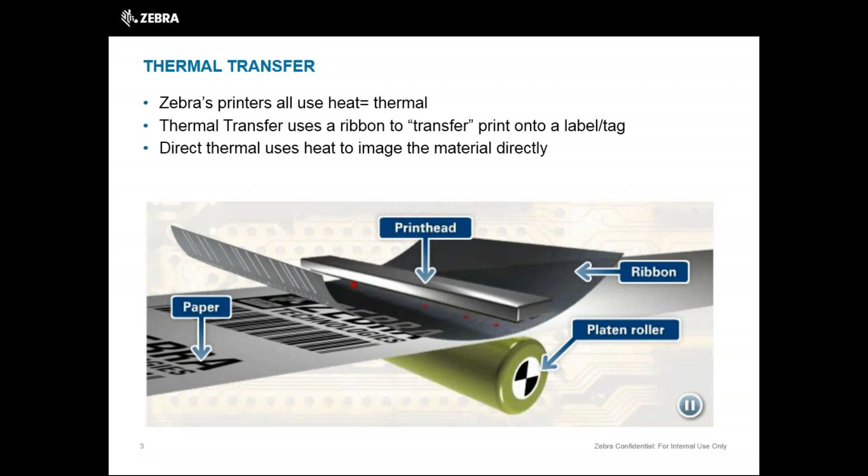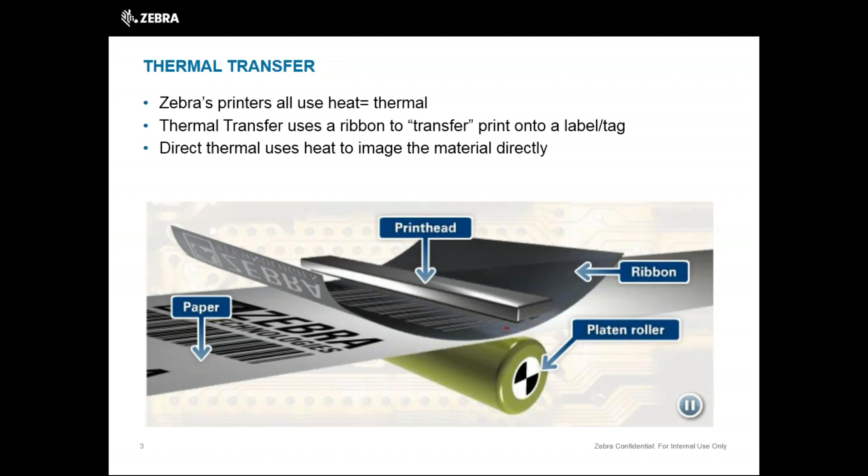The red you can see is the heat coming down. The darker grey depicts the ribbon. By ribbon, we mean an actual roll of very thin polyester film, with ink on the back of it. The term thermal transfer comes from the fact that the heat is transferring or melting the ink off the back of that ribbon and transferring it onto the substrate underneath. By substrate, I just mean whatever you're actually printing onto.

With direct thermal, no ribbon is used—I'll come back to thermal transfer in a second. The materials used in a direct thermal printer have a special coating that, when heat comes into contact with it, reacts and turns black, and that print becomes part of the label or tag. To use an analogy, think about putting a piece of steak or vegetables in a griddle pan—where the pan is hot, you get dark marks on the meat or vegetable. It's a little bit the same when you print onto a direct thermal product.

That print becomes part of the label or tag, and that's irreversible. So usually the white surface would turn black when the print appears on it. You can get coloured direct thermal, but I'd say 99.9% of what we do is with a black print.

With thermal transfer, as we explained, this is where the ribbon is used, and the ribbon passes between the print head and the media, and the heat causes that ribbon to release its ink and transfer it onto the stock.

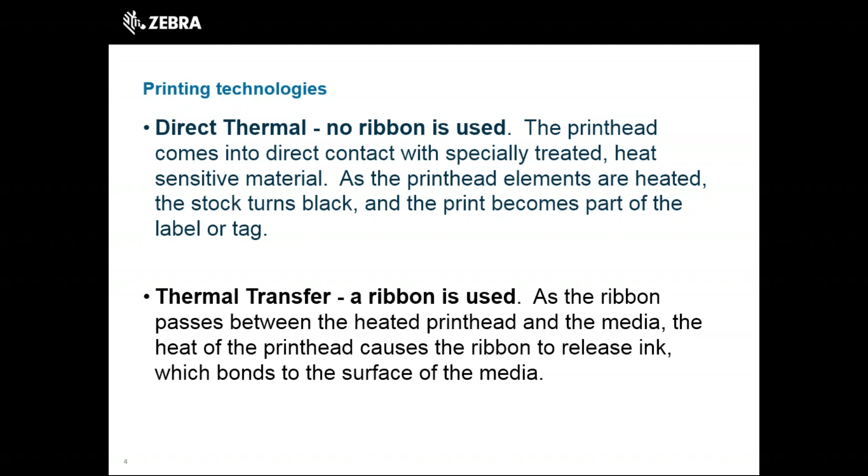But why do we have both? What's the difference between the two, and when would you use them? I'm going to start again with direct thermal. Direct thermal has got lots of advantages because you only have to buy one item. You buy a roll of direct thermal labels, put them straight into the printer, and you're printing straight away. You'll get high quality images, it's easy to use, quick and simple.

If you think about a nurse or doctor printing a wristband in a hospital, our wristbands are direct thermal because they've got more to think about than setting up a printer. They just want to pop that roll or cartridge into the printer and go. And you do get really good quality images.

Direct thermal is fine for lots of applications. If you order a parcel from Amazon, the label on there will be direct thermal. And I do check labels that come on my packages - I know that's a little bit sad, but I do get my label and have a look and see what kind of product it is.

But an Amazon label, for example, what's the lifespan there? If you have Amazon Prime, that label maybe has to last 12, 24 hours maximum. It's absolutely fine, and Amazon are printing hundreds of millions of labels a year, so they want quick and easy, simple operation. The downside to direct thermal is that because it's a heat reactive product, it reacts to other heat sources, not just the heat from the printer.

So if you were to put a direct thermal label outside in the boiling hot sun in Dubai, or even in this country at the moment because of the heat wave we're experiencing, you'll see it's sensitive to that heat also. Usually direct thermal is for short lifespan labels that don't need to resist a lot of environmental conditions. You've got a limited range of products with direct thermal, but we can cover a lot of applications, and actually our biggest selling label material is our premium direct thermal product. So it's a very popular choice, but tends to be for shorter life and simple labeling applications.

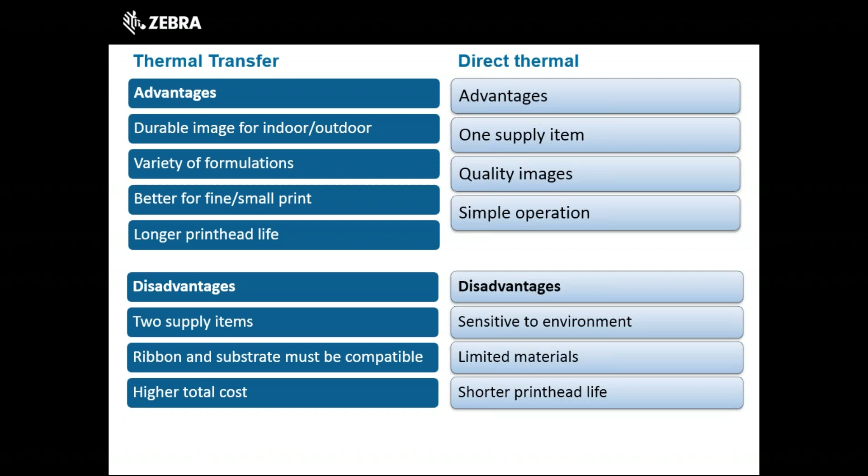We've got 6 manufacturing locations across the world. 2 of those are in Europe and 4 are in the States. I'm still holding out for a visit to the California plant, but with the weather at the moment, maybe I don't need to. In the UK, which is where I'm based, this is our biggest manufacturing facility for Europe. We also have label manufacturing in Heerenveen in the north of Holland, where we also have our distribution centre.

Supplies actually represents a $9 billion market, so there is a lot of business out there, both for us and for you.

We offer a variety of products, something for every printer that we make. So we have tags, labels, receipts, ribbons and wristbands, and we are in fact the largest thermal converter in the world when you put all those sites together.

But why are supplies important? I know we're going to talk about printers in a little while, but let's face it, every printer requirement starts with the need to have a printed output. So you don't buy a printer just to buy the nice box, even though they are fabulous. You buy it because of the printed output coming out of the front of the machine.

Our research has shown that every year you can spend 3 to 10 times the cost of the printer on the supplies, and the quality of those supplies can directly impact performance. It can impact how well your printer runs, the amount of uptime you've got and your productivity, and therefore the quality to your end customers if you don't have something that is working correctly.

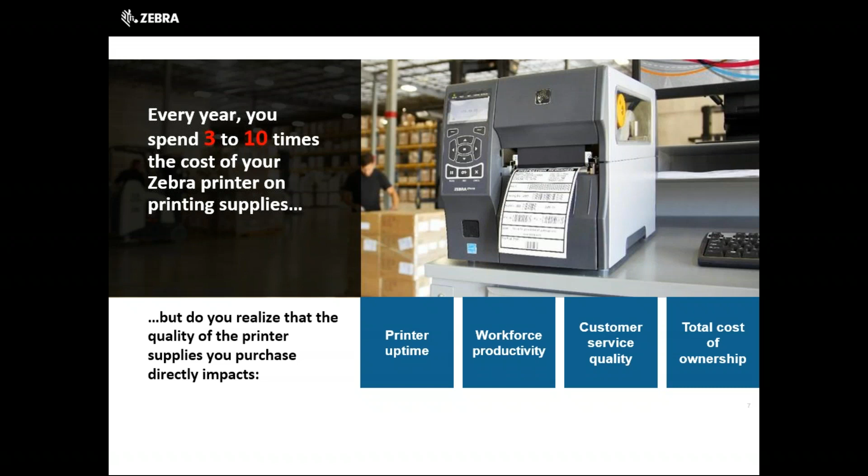So what do our supplies offer over and above other products in the market? Let's have a look at what we do to make our supplies the best.

Zebra supplies are called Zebra certified supplies, and that means simply that they are certified for use in our printers, and they are the only products on the market that are certified for use in the printer.

We realise there's a lot of choice on the market and not all materials are created equal. Something that on paper may have the same specification as another product might perform very differently when you put it into a printer.

So our job and what we do for you is to go through the choice of products on the market. We make it our business to know what's available and what the quality of products is, and from those we'll make a selection. It's a little bit like X Factor - we start with lots of products and filter them down until we have the best ones at the end.

We do a lot of our testing ourselves here in Preston. We have a print room that's got one of each of the Zebra printers in it, and we can do a lot of filter testing here.

For example, if it's a paper that we know will be used in a mobile, a desktop and a mid-range printer, we wouldn't just test it in one, we'd test it in all of them at a range of temperatures and a range of speeds to try and simulate as much as possible actual end user use cases.

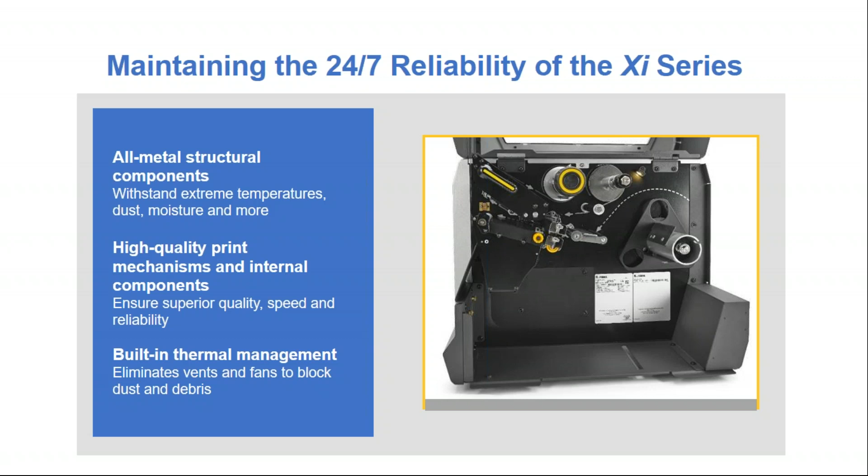Many thermal transfer applications have operating environments that can be brutal to printers. The design of our Xi series means that number one priority for us is still reliability, and throughout the product we make design choices that reflect this. We use the toughest materials in the design to meet the challenge of a long life in tough thermal transfer environments these printers can encounter.

It's not uncommon to see ultra-fine, high-resolution output in a thermal transfer solution, particularly in high-tech manufacturing, electronics, and also the pharma industry. The design of the printer allows for small media performance and associated ribbon handling, printing down to 3mm labels.

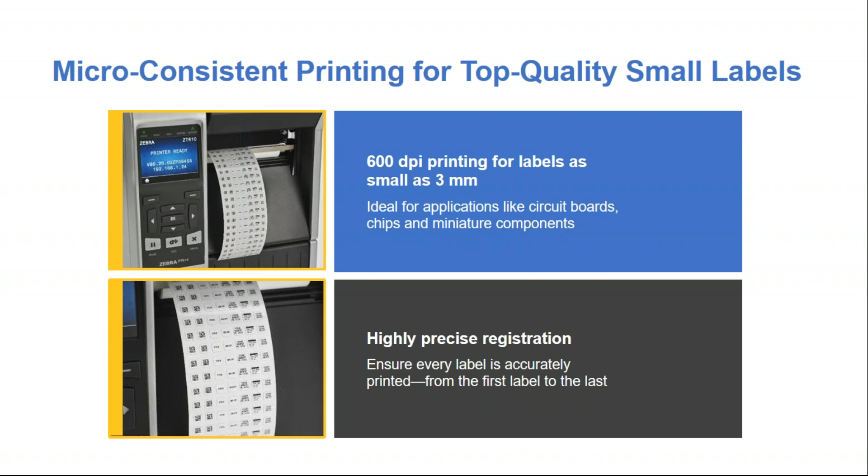Reliability and features shouldn't come at the cost of complexity, and with the ZT series we've made many improvements. Shown on the ZT600, and perhaps most obvious, is the side-loading media, so no more threading the material from the rear through the printer mechanism. Other improvements are well-guided media and ribbon paths to give visual clues to the operator.

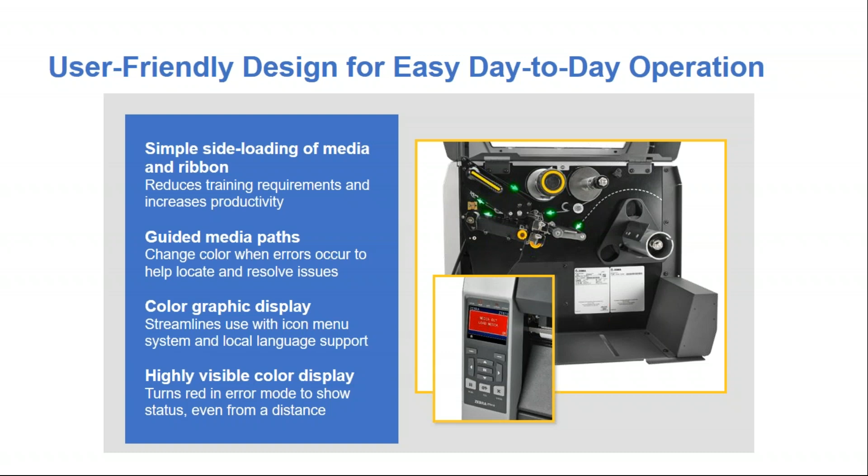Despite all the management applications we alluded to earlier, we now know that many customers manage their printers directly. So we have a color display that gives you a variety of different signals, amber and red conditions for the printer status, something that can be seen from several meters away. Ribbon usage can be more accurately measured and managed via this means as well.

Looking at the desktop printers, there is a changing market in this portfolio - better connected, smarter, users and applications requiring more. Easier ways are needed to integrate, use and manage a desktop printer.

Ease of use is perhaps most evident with the ribbon cartridge in the ZD420C. It should be noted that all the competitive thermal transfer printers are more difficult to load, with secondary spools, cores, mechanisms and levers, which add to the complexity and time associated with ribbon loading techniques.

Our EMEA market represents 250,000 thermal transfer desktops, some of which are competitive devices, so a LinkOS virtual device is certainly a worthwhile investigation.

The markets and applications available to the ZD420C are no different to the other thermal transfer printers. However, there is a need for an easier, error-free solution.

There are two schools of use for the cartridge-based ZD420: infrequent users and also the prolific ribbon users. You have a group of people, some seasonal workers, some casual workers, who don't necessarily understand the product. When it comes to changing the ribbon, it leads to complexity, it leads to errors, it leads to increased downtime.

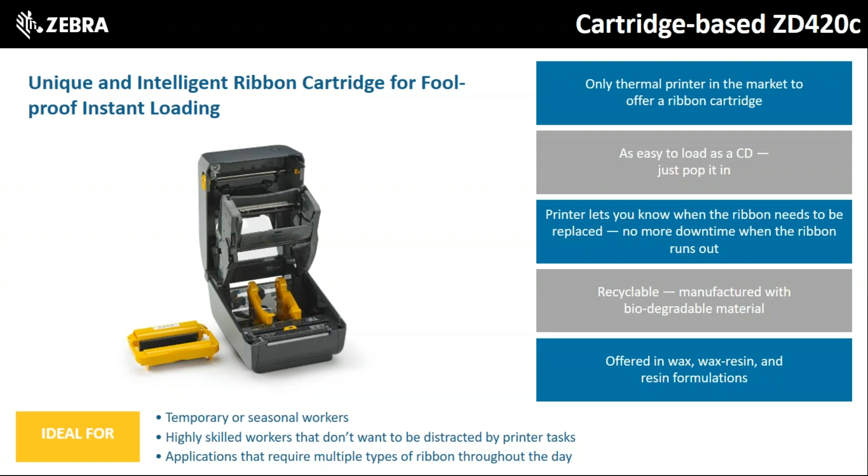The chip-based cartridge means there's cognitive ability between printer and ribbon. We can accurately alert users to any issues, warn them of any impending ribbon change, so a new cartridge can actually be readied in advance.

Many of the printer's points of use will see mission critical output, so these can be reconciled against the print job and also against the installed ribbon type. Certain alerts can be set around that.

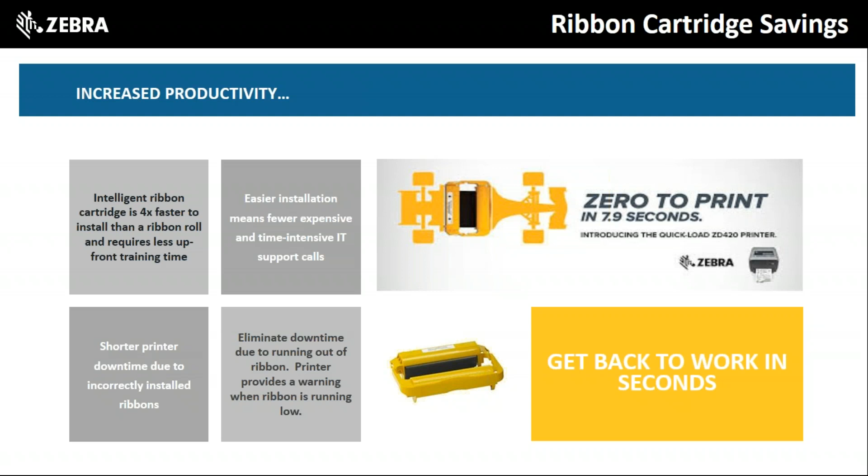The cartridge solution is also cleaner, so applications where dirt or particles are being measured will benefit from this cartridge-based ZD420C. Think about laboratory workers.

Now, we need to factor in several elements when we look at the cost of managing a thermal transfer solution. A lot of people do argue that the cartridge-based ZD420 is perhaps more expensive, so hopefully the next couple of slides will start to dispel some of those myths.

So the various factors that we need to look at: productivity, support costs, and downtime. Now, an average customer will incur between 20 and 40 hours per year of IT support to assist users with ribbon loading issues. This is based on a 100 printer installation. Many of that IT support hours is down to regular supplies concerns, ribbon loaded incorrectly, lost take-up calls, etc.

Now, when a thermal transfer ribbon cannot be installed or is incorrectly loaded, then those associated labels cannot be output. And many of these business processes where thermal transfer are used are fairly critical. So the solution here allows for those finished goods and that production to keep going, that production line to keep functioning.

So again, we've got no loss of productivity, and in certain applications, that loss of productivity can run into the thousands of euros per hour.

Our unique ribbon mechanism design sees dual ribbon handling lengths, longer lengths accommodated compared to competitors. It's a unique roll-to-roll design that allows for easy ribbon installation without the complexities associated with many competitor solutions. The roll-to-roll system for ribbon supply and ribbon take-up means the loading process is kept to a minimum. It also allows for partially used rolls to be easily removed without breaking them, essentially a drop-in, drop-out method, meaning ribbon types of wax resin can be interchanged as appropriate to the media being used.

The dual ribbon capability provides two ratios of ribbon to media. The 74 meter offers a 1-to-1 ratio, whereas the 300 meter is a 4-to-1 ratio. Therefore, the appropriate meterage can be selected according to the application. A longer ribbon roll means increased uptime, less frequent roll changes, and also a cheaper price per meter.

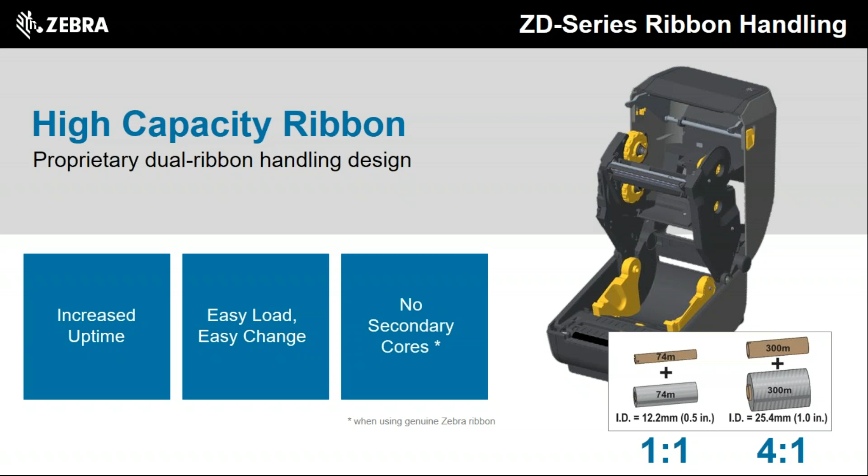For any of you that sell multiple brands, I would challenge you to load a ribbon in a competitive printer quicker than you can in a Zebra thermal transfer desktop.

Our design of the new ZD series has seen improvements and enhancements to the media handling on both the ZD420 and ZD620 models. I won't talk at length about all of these except for one feature, the media dancer arm. Another step change on our ZD series desktop printers in respect to print quality is our dancer arm feature. It's now available in a compact desktop form factor on the ZD620 model, so it's unique to this class of printer.

Customers buy a Zebra desktop printer because of the known print quality. The media dancer arm maintains even tension on the media roll and delivers maximum print quality on every label regardless of print speed. Competitive printers operating in thermal transfer mode need to lessen their print speed to achieve some level of quality. We can maintain the expected Zebra print quality and run at the highest speeds thanks to this new media dancer arm feature on our ZD620.

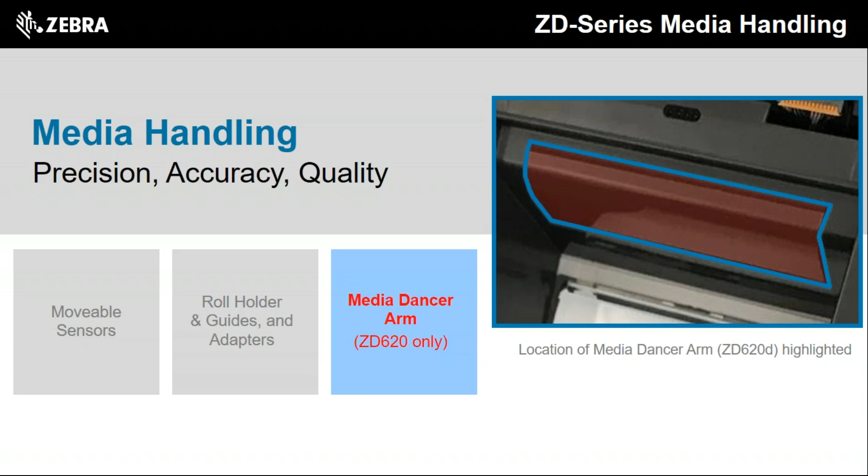With the ZD620, you get the same advanced technology as our higher end industrial printers, but in a compact desktop form.

Hopefully some of you will be familiar with the term Thermalock. Some of you might have been familiar with an older mobile model we had, the P4T. However, that was removed from sale. However, there's still a need to take thermal transfer in the field or on the go, so Thermalock is our answer to this.

Thermalock is a new product, exclusive to Zebra. It gives excellent performance and durability, but in a direct thermal solution. So you may ask, how can that be? Well, regular direct thermal works via a chemical reaction between heat and the dye chemical. Because it changes colour with heat and chemicals, it's also susceptible to other sources of heat, so it fades under sunlight and can also be affected by chemicals.

But Thermalock is different. Its structure is like that of a honeycomb, made of a proper polypropylene film. The way it works, it breaks the skin of the material, if you like, to reveal a black layer, and this black layer is far more robust than traditional thermal transfer solutions. So if there's a need for thermal transfer and true mobility, then Thermalock is certainly a consideration.

Like I mentioned, we used to have a thermal transfer mobile printer, the P4T, but unfortunately limited sales saw us remove this from sale. We can, however, still offer some level of robust output on that mobile printer by way of the Thermalock.

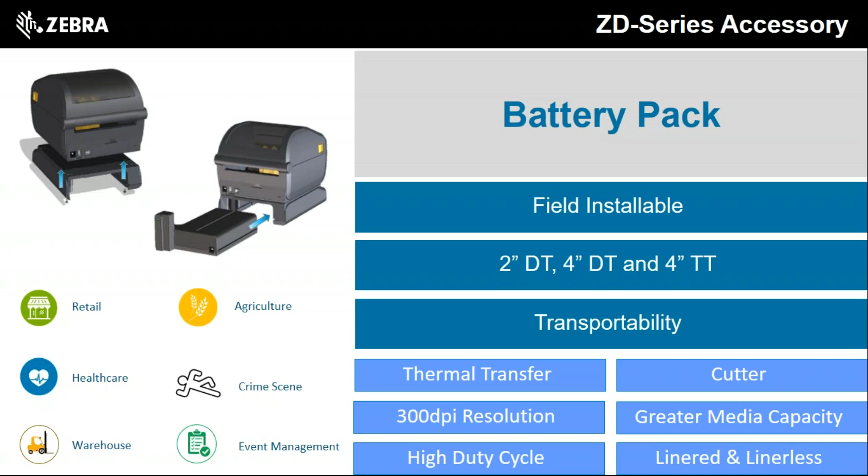But for a true thermal transfer solution on the go or in the field, we are developing a transportable solution, launching later this year. It will be a field installable option for the ZD410D, any of the ZD420 models, or the ZD620 models. This battery pack offers you the possibility of fulfilling your thermal transfer output at the required point of production or use. We're currently running an evaluation program, which we do prior to any product launch. So if you're interested, please contact Vera or myself, and we can give you further details.

Now, Catherine was talking about some of the applications earlier. We could talk about thermal transfer applications all day. However, there's growth there, significant growth. If I looked at our sales numbers for 2017 versus 2016, there was very healthy double-digit growth.

We had 15% growth on thermal transfer desktop printers, 13% growth on thermal transfer tabletop printers. And we're seeing real step changes with regards to RFID use. For our RFID desktop and industrial models, there was over 50% growth on thermal transfer RFID applications. Again, this growth was seen across all regions: central, DACH, east, north, and south. Very healthy double-digit growth there.

Now, our thermal transfer desktop sales for EMEA in the mid and performance tiers account for 40 million annually, and this is hardware only. It excludes associated supplies and service business that can quite easily be attached to it.

But the way we manufacture, the points of use, the methods of shipping, the environment in which the printers are used, or the extremes of where that printed output will exist, demand a more robust output. This is what is driving that growth in the thermal transfer space. So it's that longevity of the printed output that requires thermal transfer.